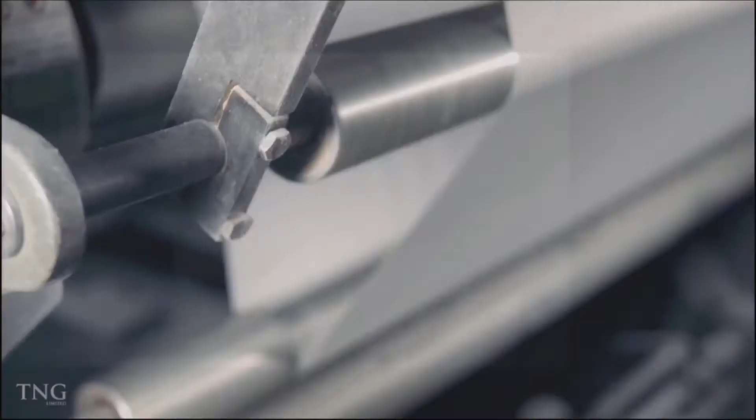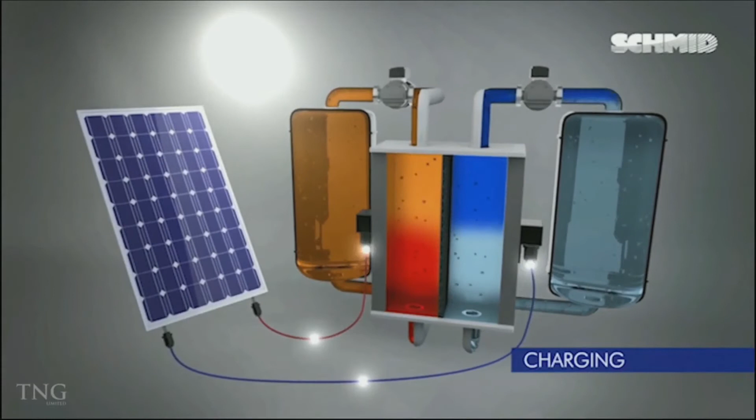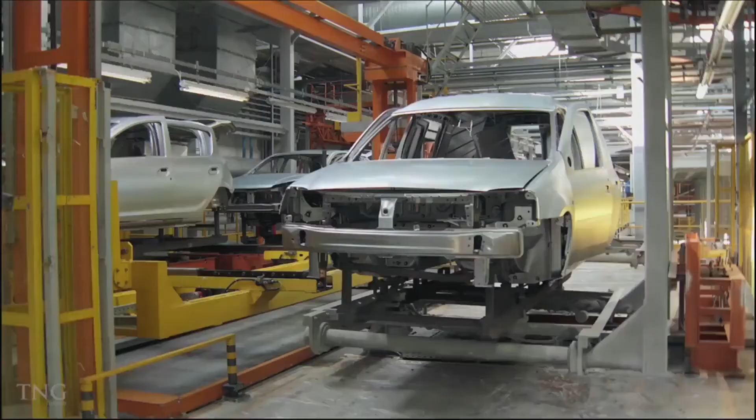Vanadium is a critical ingredient in the production of extremely strong steel alloys. Today, vanadium is being increasingly used in the rapidly growing electrical storage sector with the use of vanadium flow batteries. These batteries are powerful, durable, and have extremely large capacities. Steel continues to play an important part of buildings, infrastructure, ships, automobiles, machines and appliances that we enjoy today. Iron ore is a critical feedstock for today's steel industry.

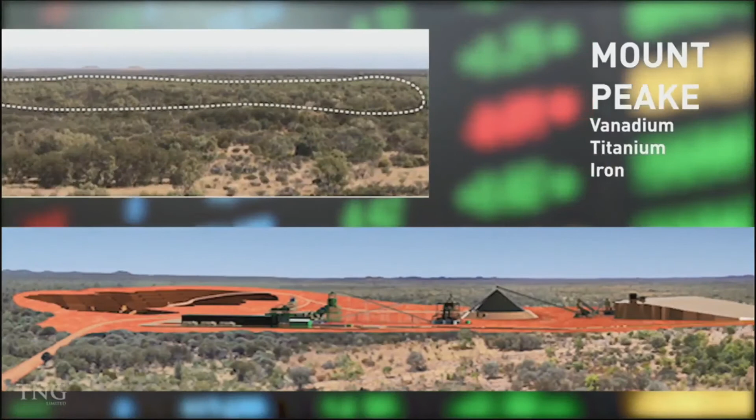TNG, an Australian resources company, is focused on producing all these critical products from the development of its Mount Peake Vanadium, Titanium and Iron project. The company, in partnership with SMS Group, have developed German processing technology that will see us produce 100,000 tonnes per annum of titanium dioxide pigment, 6,000 of vanadium pentoxide, and 500,000 of iron oxide, all critical ingredients for our future. A mine in the Northern Territory will provide valuable feedstock for 2 downstream processing plants in the seaport of Darwin. TNG is well advanced in its project development and is aiming to build a world-scale strategic metals business.

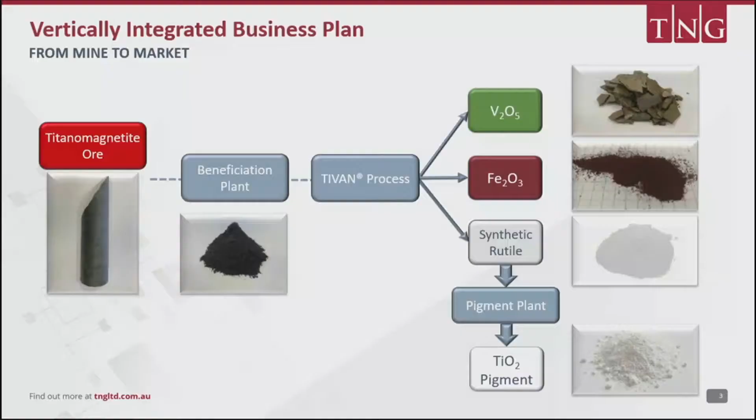So I think that gives you a good introduction to the company, and key takeaways there are that we have a very large, flat-lying, shallow resource. It's in the middle of the Northern Territory and it has an infrastructure corridor of road, rail and gas very close by to the resource.

We've got a vertically integrated business plan as demonstrated on the slide now, and the value add that we provide to the resource gives us very, very robust metrics of just under 3 billion Australian NPV and a 40% IRR. We've got a tier 1 group of development partners that we've arranged over the years, and all of our products are in offtake as well, as I'll explain later on.

On the slide here, we go from the titanomagnetite ore that contains the vanadium and the titanium. We extract the concentrate out of the beneficiation plant at the mine site, a very simple operation, it goes through our process plant, which is going to be located near Darwin, and we produce the 3 products shown there. We upgrade the synthetic rutile that comes out further through the pigment plant to produce a very high-grade coating pigment.

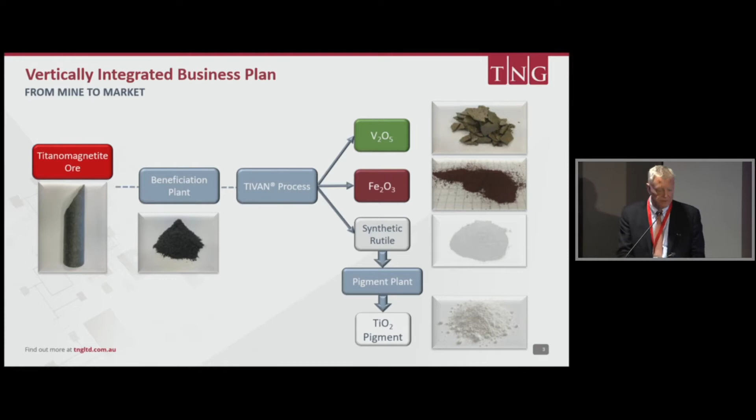Why is that important? The important part is that every one of our products is going into a growing global market. Titanium dioxide, for example, 60% of it is used in coatings. We've identified that the best coating for us is an outdoor coating for weatherproofing, etc. That's the TNG 360 that we've trademarked.

But most importantly, in the titanium feedstock area, the existing ilmenite feedstocks are depleting globally. So with what we've discovered with our process at the Mount Peake deposit, titanomagnetites can now be used as a feedstock for the titanium industry. We're seeing a trend of existing pigment producers acquiring their own source of feedstocks, for example Tronox has its own mines. We're going to see a lot more consolidation, possibly leading to some takeovers. It's a very interesting time for TNG in this space.

Vanadium pentoxide, traditionally, mostly goes into the steel industry. It's a strengthening agent. We're seeing a lot more vanadium going into steel these days, principally on the back of China's demand for higher strength reinforced bars. We're also seeing a growing area of superalloys and the vanadium redox batteries, which are still lurking in the background, waiting for a suitable business model to take them into the alternative energy sector. A bit more on that from us later on.

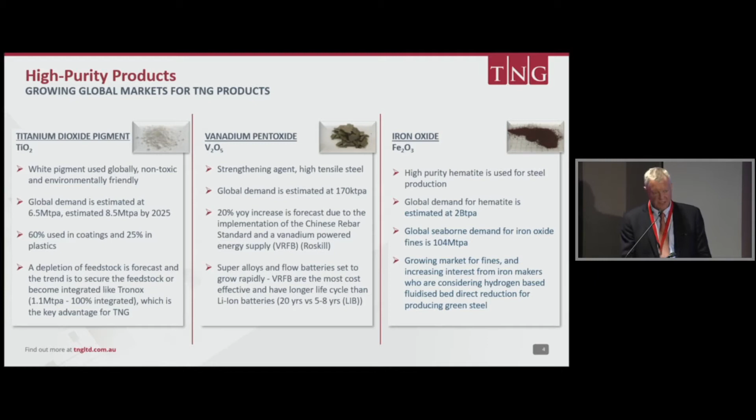Iron oxide, high purity hematite, is what we produce. It's good, strong, solid demand, but importantly, with the switch to greener production of iron and steel, there's a move towards hydrogen-based fluidized beds to take away the dependence on coal, and this means they're using a lot more high-grade hematite in their steelmaking process, a bit more of a greener product.

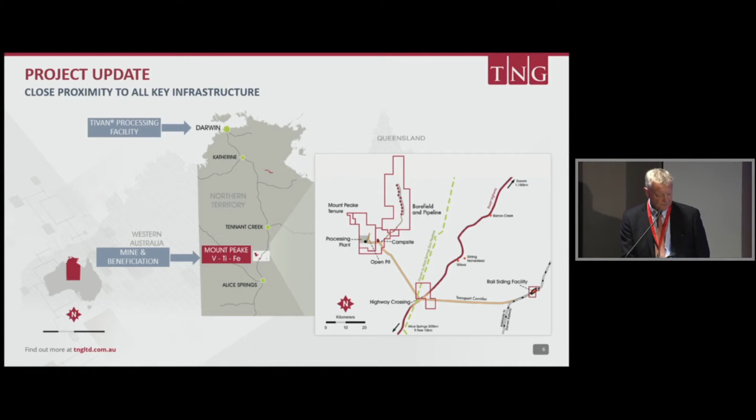Let's look at the mine site in more detail. What have we actually completed to date? We have the layout of the whole mine completed. The bore field has been identified. We discovered enough water there for the life of mine, 37 years. Power sources, we've identified the sources of the power and the potential builders. The integrated waste landform has been advanced. That's now in a position where it can be finalised. Geotechnical work is all progressed, all ready to be finalised.

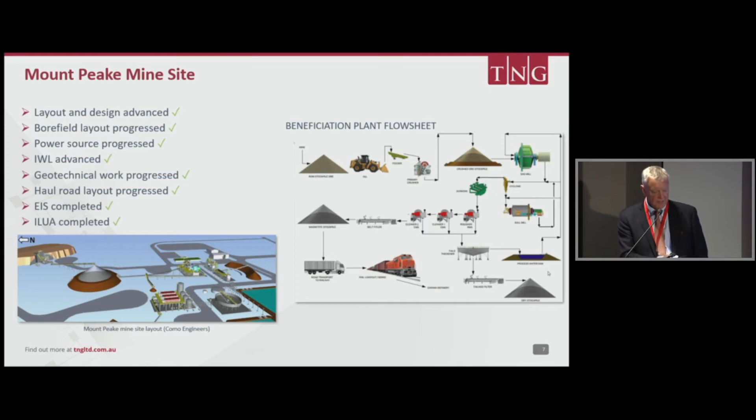The haul road layout is completed, that is, it hasn't actually been put in yet. The EIS has been completed and the native title agreement is also completed. We have the mining licenses granted, so subject to finance, we're ready to go at the mine site, bar just a few tidying up of some of the layout designs.

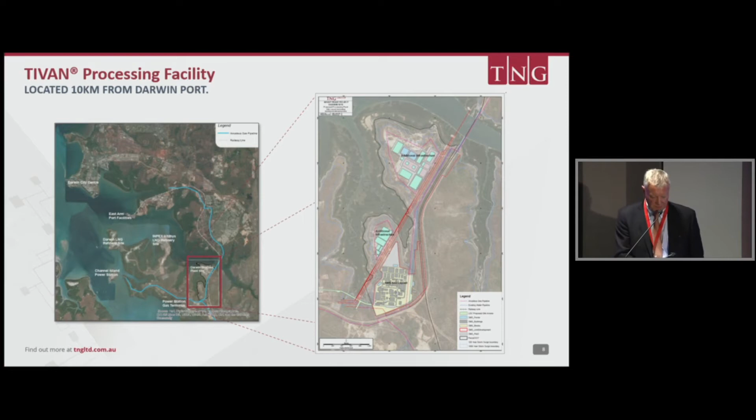With the processing facility in Darwin, we have some land that's specifically allocated to TNG, shown there in the black. It's located right on the railway and it's 10 kilometres from the port. The SMS Group, our German development partner, are doing the final design and layout for the plant. And ideally located here, what we're going to see is a schematic view of what the plant looks like from SMS at the moment. This gives you an idea of what we can expect to see from this type of process there, with all the different types of buildings. Everything's covered. It's a very, very clean processing facility.

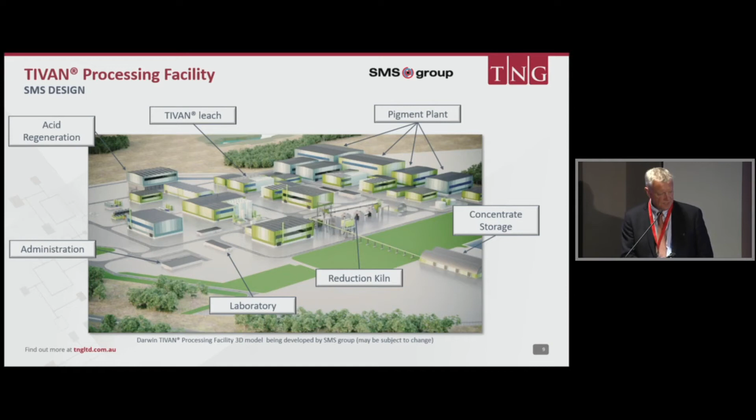So the past 12 months, obviously there's been some interruption with the COVID challenges that everybody's had to face. However, I'm very pleased that we managed to complete some significant milestones in that time. Most of the work has been focused on the SMS Group's FEED, which is the front-end engineering and design. This is combined with support from Como engineers here in Perth and also Tycons, a specialist in pigment production in Germany.

We've also managed to secure the life of mine agreements for the hematite product with the Vimson Group, and a life of mine agreement with Gunvor, tying up our remaining 40% of the vanadium pentoxide. We mandated KfW IPEX, a very large German resource bank, for the total amount of debt for us. The KPMG corporate finance team was appointed to advise us on the correct, appropriate structure of any finance deals, and also to assist with equity and, importantly, any potential strategic partners and/or takeovers.

A very detailed NAIF application has been submitted. This is a big document, and we expect to get some funding through from NAIF. At the moment, it's going through their due diligence process. We executed a new facilitation agreement with the Northern Territory Government following the new government, and this basically puts all the relevant departments that we will be dealing with in touch with us for speeding through all the remaining permitting that we have. The Mine Management Plan was submitted, and comments have been received back. We've reviewed those, and we've now submitted our comments back on the Mine Management Plan. We're expecting that to be accepted.

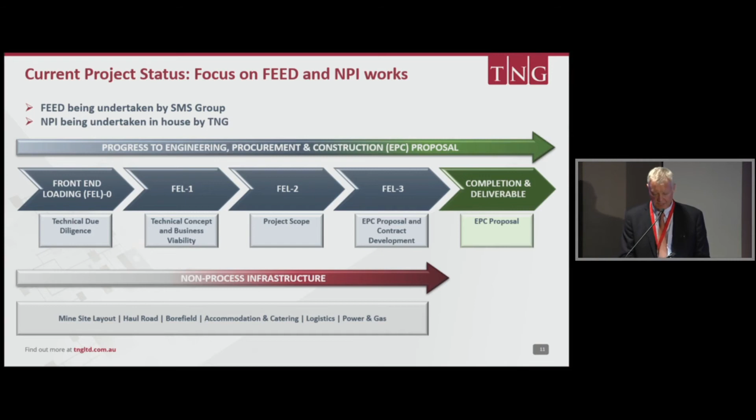All of this stuff is documents required for them to calculate the final turnkey price that they'll be providing to us in their EPC proposal. At the same time, we've been progressing the non-process infrastructure in-house. That covers the mine site, haul road, bore field, accommodation, logistics, everything that's not actually in the physical plants that have been designed and laid out by the SMS Group and their support.

Looking at it somewhat differently, if we look at what the SMS Group has been focusing on specifically, where COVID came in, we now would say that we're about 75% complete on that timeline. I'd actually venture to suggest that we're a little bit further advanced than that. What has held us up with COVID on the German side has been the confirmatory test work at the laboratories, and in Germany a lot of those were closed down, unfortunately. So that created a backlog and also some delays in confirmatory test work. So things could only be progressed to a certain point without having that final test work to confirm things. So I think we're probably a little bit further ahead on there.

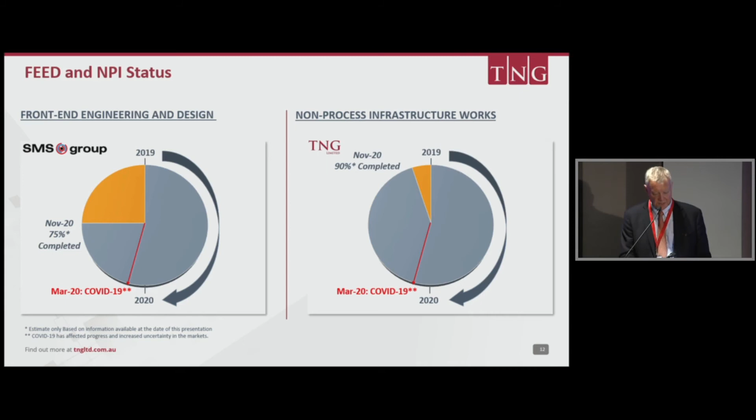Non-process infrastructure works, I'd say we're easily 90% completed. Really just everything's ready to go to final tendering. From a permitting side and approval side, the mine site is completely permitted. Environmental approvals, native title agreement, mining licenses, mine management plan, all in very good shape, all agreed, executed.

Darwin processing facility, different story. We still have to get the EIS supplement submitted, which I expect to be the end of the year. With all the work that we've been doing, having received the comments, we don't expect that to be any issue. Land acquisition negotiations, that land that's been reserved for TNG is Crown land, and we're currently negotiating the terms of that with the Northern Territory Government. And there's a number of other regulatory entities as well that we're engaged with for both environmental and mainly operational approvals.

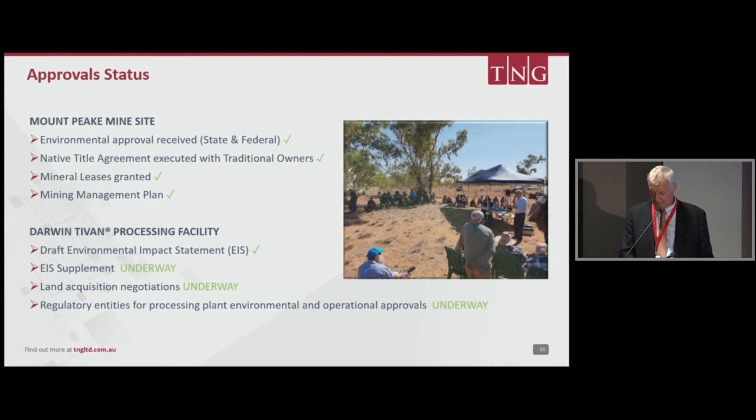Offtake status, as I mentioned previously, all of our products are taken up with what I would call Tier 1 global groups. DKSH, very, very large group. Both Woojin and Gunvor will be sharing the vanadium pentoxide. And the Vimson Group, very large group out of India, conglomerates, iron ore miners for the last 50 years.

On the funding side, we have KfW that I mentioned we've mandated, very large bank, exclusive to these specialised type of projects. They'll be looking at the whole debt structure. KPMG, as I mentioned, we appointed them as our advisors to execute the most suitable debt and equity components of the project. But also they've got very good experience of working both with KfW and NAIF, which is obviously an added advantage.

Looking ahead, we can see we've got completion of FEED, obviously, permitting for Darwin at the processing site. We need the EPC proposal from SMS Group. TNG board will need to make its final investment decision. Finance will need to be completed. Appointing the final EPC contractor or contractors. Establish our full project development team in-house, and then commencement of development. Now, being the optimist that I am, barring any further delays, I do expect all of that to be completed within the next 12 months.

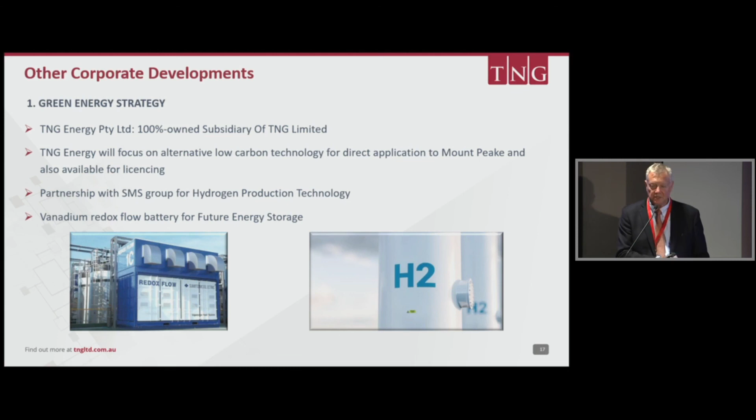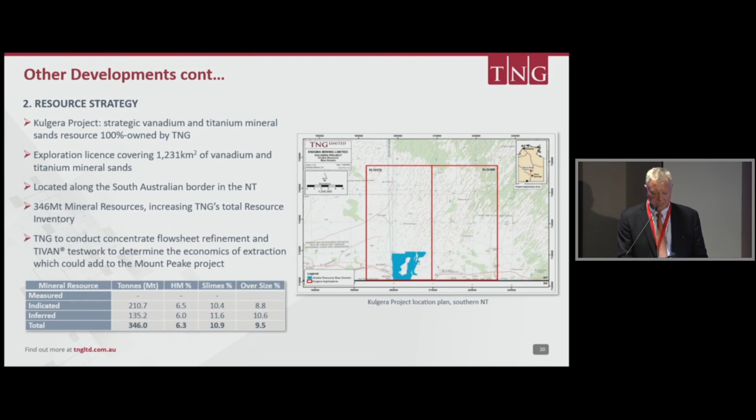Looking at the time, I'll have to leave it there. I was just going to go on to the other corporate developments. I'll briefly go through, we do have a green energy strategy, and please look at the ASX announcements about what is going on there. There will be some more news flow on this, particularly on the vanadium redox battery side, and also on the hydrogen developments with the SMS Group. And also, we're increasing our resource base for the future, increasing our total resource inventory from a strategic perspective. Thank you very much for your time.

Thanks very much, Paul. A couple of questions have come through, one from a Gold Coast investor. When do you expect to secure funding and announce a final investment decision? Great question. The current timetable would be a final investment decision mid next year. And look, we have KfW already appointed. They have done a certain amount of work for us. We know that that's going to take at least 6 months once they do get the final number from SMS, which we do expect relatively soon. So I would expect all of that to be wrapped up in the next 12 months.

Okay. And one from one of our webinar viewers. Would you consider spinning out the vanadium redox flow battery business, or planning to keep it in-house? Look, it's most certainly a long-term view that it would be its own business unit, and particularly in the company subsidiary that we put it into, TNG Energy, that could be spun out, and also with a value add for shareholders.